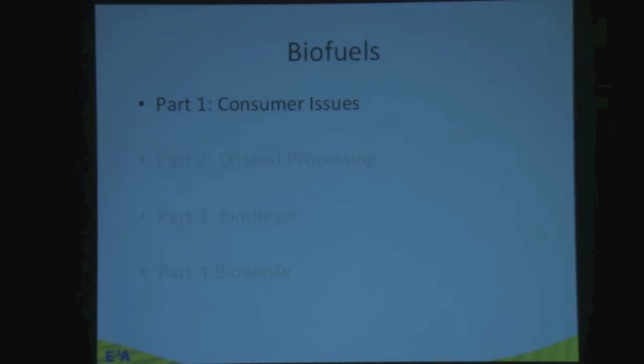So, in general, biofuel is simply just a liquid that you can make that either will come from a plant, algae, or animal parts, animal fats. So the crop plant may be oil seeds, such as we'll discuss at first, or it may be vegetable oil.

Algae, I just came back from the International Biomass Conference in Minneapolis, and it probably isn't real feasible up in our area, though we have a lot of coastline and such, as much as it is in the warmer parts. They're doing a lot of work with it off the warmer coasts down south. And there are places even in the Midwest that are using algae, growing them in large ponds. But there's a different type of processing. They tend to throw it in with anaerobic digesters, which we'll talk about a little bit later.

So animal waste, not just fish, as I mentioned, but even turkey poop's being used to drag the BTUs out of it for gasification of fuels, mostly for space heating. So some of your bio products can be pressed and immediately used in a traditional diesel combustion engine. Some are going to supply heat just in the form of burning the straight BTUs and pumping heat in for like space heating and such as that.

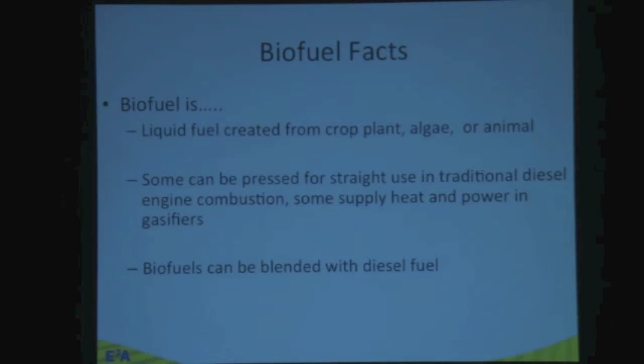So in Alaska, there are 2 main types of biofuels that are obtained from ag products. Obviously because of the short growing season and the incredible height that we have of sunlight, especially in the interior and Palmer, it's not real conducive to corn for ethanol, for instance. Now there is corn being grown as feed corn down on the Kenai, but you could never really make it profitable enough to try to raise corn. Your inputs and your energy would be too much on the Kenai to try to get the kind of scale that you would need to go with some type of ethanol production.

But especially up in the Delta Junction area east of Fairbanks, they tend to grow a lot of barley, which isn't an oil seed, okay? But they can go ahead and also grow canola. And canola comes off, you'll see that's the canola flower up in the left-hand corner. And you can get rapeseed, which can be crushed, and then that seed secretes an oil.

Another type of plant, and by the way, some of the farmers up in Delta just this year, for the first time, are making a real concerted effort towards securing land so that this planting season they're going to actually put some canola in the ground and see how it presses out in the end.

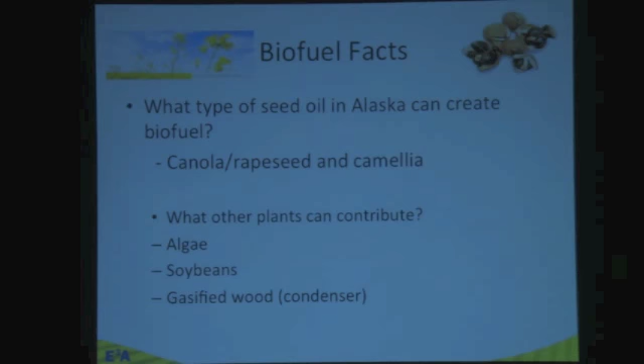You can gasify them, and you can then take the vapor from the gases of the burning wood, and you can condense it by cooling off some of that vapor and having it more or less poured off to the side and put it back into a liquid form.

So one of the things that I want to emphasize that you might not normally think of is when we think of trees, we think of forestry. But the U.S. Department of Agriculture, well, it worked obviously with corn, all right, and the Department of Energy on solutions of making ethanol. USDA is also very involved with wood, because in the industry codes that are used in North America, wood and trees are seen as a crop. They're actually seen and classified as an ag product.

This is somewhat important when you're looking for grants and you're trying to find sources to try to figure out exactly how things are categorized, because you might be able to cross over if you had an experiment project that you wanted to do with even a couple of different agencies. You know, Department of Energy may be interested in it. And as far as wood gasification, you know, it might be also that USDA is interested.

And even in some cases where they're starting to make biofuels for fighter jet fuel, the Department of Defense will sometimes do investigative RFPs to try to get production, because they have certain quotas they're trying to meet as far as turning all of their fuels for their ships and aircraft into biofuels.

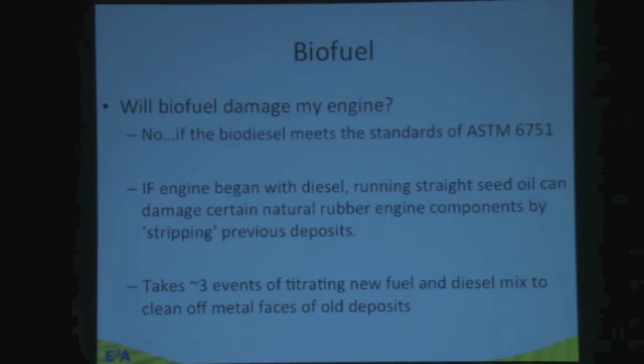Now, vegetable oil is something that is used in engines that might even be a dual source. The director of the Alaska Center for Energy and Power out of Fairbanks, which is kind of the research arm for the whole state, looks at different power sources—where they work, how they work, what's the best type of efficiencies out of them.

On the back of her car, she has a little sticker that says powered by vegetable oil. And believe it or not, she has 2 tanks in the car—one that runs on vegetable oil and one that has traditional diesel fuel. I believe it's a switch within the car; she can switch tanks and still run it off the same engine. I believe she gets most of hers as WVO, waste vegetable oil, out of fryers in different restaurants.

There have been experiments, though, with just using straight vegetable oil also. You can modify an engine, or have a car that uses the same engine for both. In some states there's quite a bit of experimentation with the 2 oils. In Alaska, there probably just isn't enough critical mass of fast food restaurants to really do experimentation and spend the time, money, and effort to see how those fluids operate in really cold conditions, or on the coast in really wet conditions, just because there won't be that much demand due to the lack of supply.

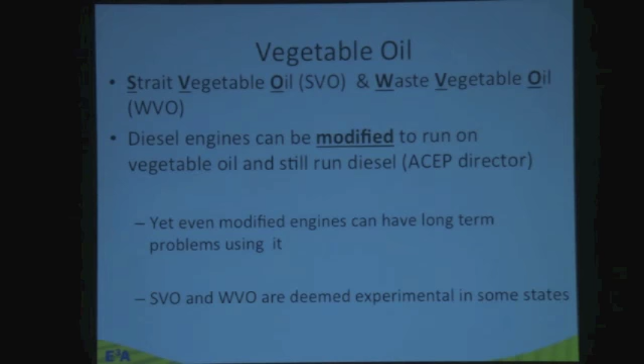So in looking at this, you need to look not just in the energy vein, but at what that product can be as a substitute good in a totally different market. That will indicate whether that industry is going to grow or not.

Let's take a little deeper look at oilseed production. You basically have machinery, and it might be sunflower seeds, could be peanuts, as well as soybeans, as I mentioned. You bring the product in as raw crop, and it's been separated from the leaves, or in the case of corn, you've stripped it from the cob—though that's not an oilseed. But we're just talking about the kernel of the seed.

So you have a process that must take care of not only making sure you have the seed separated from the leaves and twigs, but you also want to get any foreign matter out that may have been collected in harvest. Then your second stage is this crushing activity.

There may be other ways of dealing with other types of seeds, but in general, canola being one of the more popular ones, all you're doing is extruding the material out. Then you take the meal, and the meal may still have oil in it. So you've got the separating, then the crushing. You separate the meal, and you may even use solvents to eke out more oil from the meal that didn't come out during the crushing process.

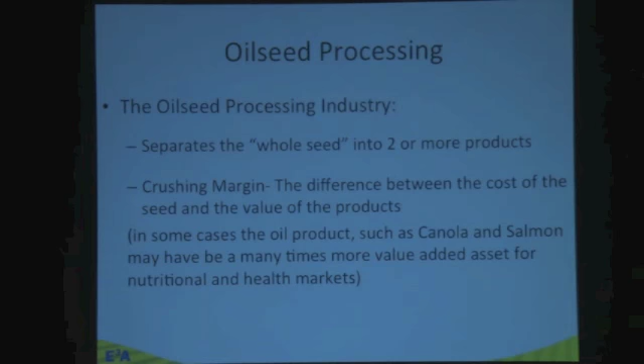In fiscal terms, they talk about the crushing margin, which simply is the difference between the cost of the actual seed and what you're getting out as the end product. As I mentioned, you need to be aware of other markets besides energy.

What percent recovery are you talking about, as far as on your first crush, getting the oil out of the meal?

The figures I'm shooting off the top of my head, and I can reference them pretty quickly, but the figures I've seen are that you can get at least two-thirds of the oil on a single crush—two-thirds of the oil out of the seed.

So what's the percent by weight? And with the feed, what do you end up with? I'll show you in a moment—I've got some of those figures here.

As I mentioned, you can enter a solvent, and the solvent not only helps in the process after you do the crushing and separation, but it can also change the qualities of the oil, such as what temperature it takes until it starts to gel.

As I mentioned, it's kind of the step you'd use to get that extra margin bang for your buck. You'd asked here about typically used facilities with capacities of less—so it also comes down sometimes to the scale of the material you're working with as to whether you're going to invest in solvents.

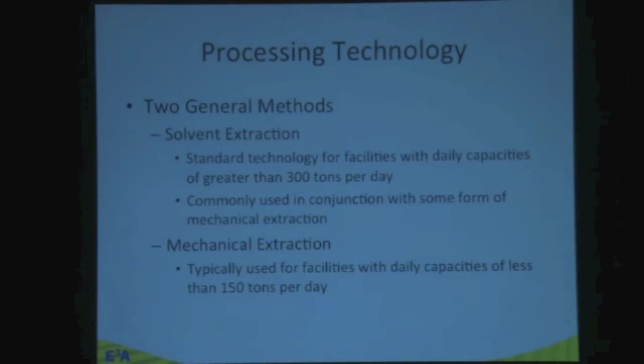As I mentioned, the different scale will also dictate whether it's worth your time to go through the processing. With solvents, you can get about 99% of the oil. It's not an evaporation process - it was explained to me once that there's a way you enter the solvent, get everything you can out of it, and then exit the solvent as thoroughly as possible out of the oil, for the sake of the rubber seals in engines if you're using it for combustion. They drive it off, not through evaporation, but through another process - I can't honestly remember what it was, but that's something I can find out for you. So that's a benefit, eking out the last that you can.

One of the drawbacks is anytime you're using a chemical process, you're also going to have a larger investment, not only in the product, but you might also come under other regulations and need other separators. You might be talking machinery, or you might be talking product. As was mentioned before, if you're doing small scale production, it's not really cost feasible.

I had worked at a small ag university in the Midwest, and they were pressing - they had tanks that were probably like 200-gallon tanks, just doing the raw pressing. It was right above my office. In the summer, we were in an area that had sometimes 98% humidity at 90, 95 degrees. And boy, you'll never forget the smell of canola when you have to sit all summer having it waft up through your door and windows. And that was just the raw stuff itself - it wasn't caustic, but it certainly wasn't pretty.

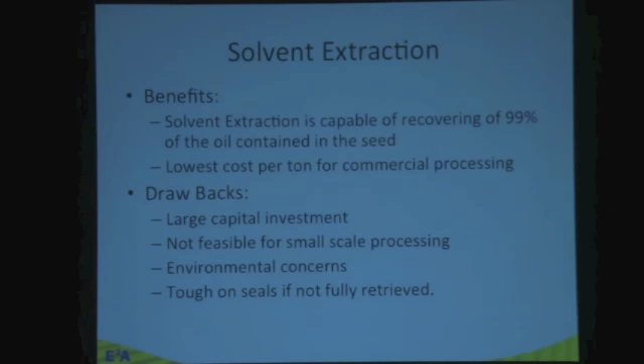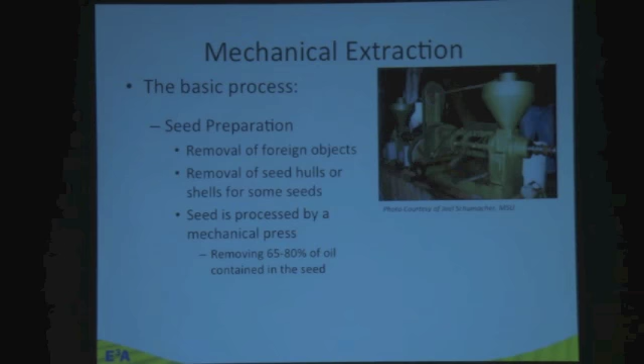So canola oil - you'd asked about not the recovery, but what the output was, I guess. It's been estimated, again from Montana State University, a state where they have quite a bit of experience, that if you had 100 acres of canola, you can end up with basically about 55 tons of material. By weight, excepting the gallons - and I'm not sure how many pounds to a gallon of oil - you'll get about 4,200 gallons of oil, and then you'll get 36 tons of meal. That's assuming you've gotten 75% out of it. So this is a situation where you've got a really good press, but you're probably not using solvents, so you're certainly not using them thoroughly.

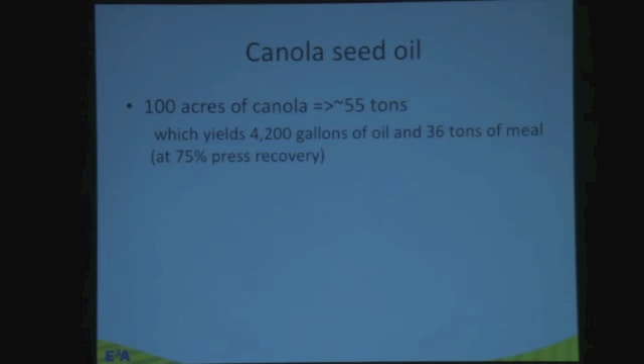The benefit sometimes of having a small scale, though, is if you have a cattle or hog operation, you can figure out that even if you won't be able to use as much in the tractor, the oil helps to put weight on the animals. You have a much more supple meal that you're giving them, not as dry. And oil, of course, has calories also besides BTUs.

So I mentioned that there's a whole industry that takes separate types of biofuels and mixes them to make a product you can run your vehicle engines off of, your diesel engines and such. And the advantage of diesel, so with ethanol, which was not oil based but more of a sugar alcohol based system, a lot of that was mixed in with gasoline. You'd see E85, some of these standards that let you know to what degree there had been ethanol as an additive.

And the advantage of mixing some of these oils with diesel is that besides transportation, you can use these, especially in Alaska where we have a lot of remote communities. If there can be some growth of these materials, you can use them on the gen sets that produce electricity. Diesel is kind of the currency fuel throughout, especially rural Alaska.

So when biodiesels are made, it's going to depend to some extent on your mixture. This is to give you an idea, I think it comes out roughly a little less than, let's see, maybe 8%. When you do your mixture, it's not going to be the same as what you normally get of pure petrol. Not that there's a degradation of the petrol itself with the mixture, but you're just not getting as much from the actual biofuels.

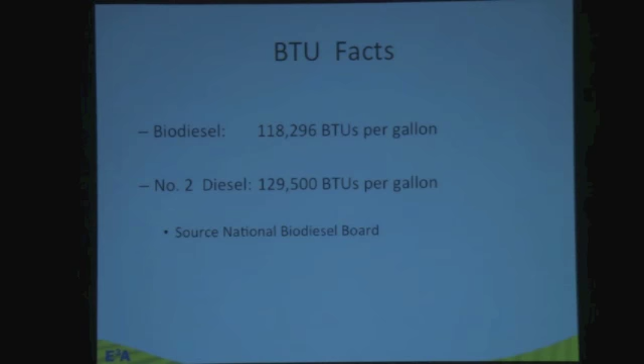So you've got a little bit of additive, and for a place like Delta Junction, if they're growing seeds, which they don't tend to do in Palmer - Palmer tends to be more vegetables and other produce for consumption, not so much grains. But if anyone was serious about getting into the industry, they would obviously need chemists on hand, and machinery that measures and calibrates very carefully what your mixtures are.

Now, one thing I'll mention at this point, only because we're going to talk a little about gasification later, is that an interesting development in Delta Junction is that they are growing crops for BTUs to burn for fuel. But it's not necessarily to make biofuels or bioliquids, let's put it that way.

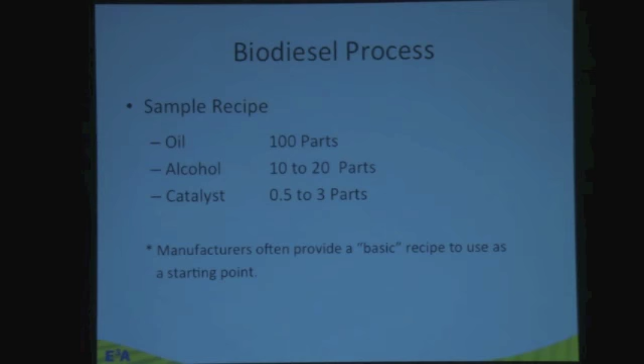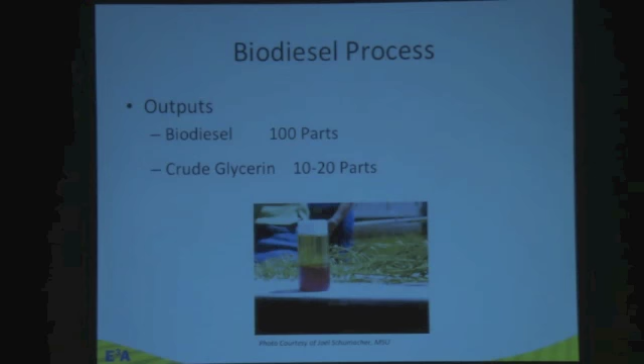So when you make these mixtures, you're getting 10 or 20% as glycerin. Here, in a micro scale production, you're talking about making maybe 300 gallons or less. So this would be something possible if farmers wanted to make biodiesels for other applications, maybe generator sets and stuff that may not be as conducive to using raw canola, like a regular tractor engine.

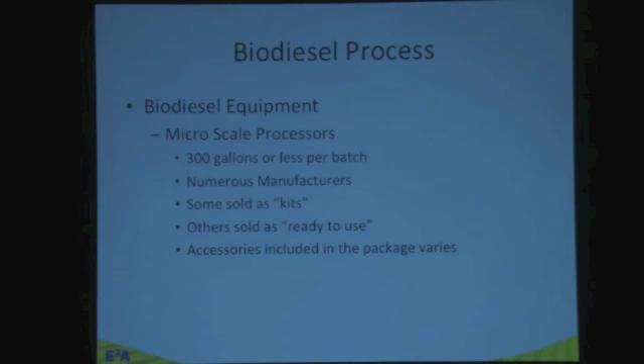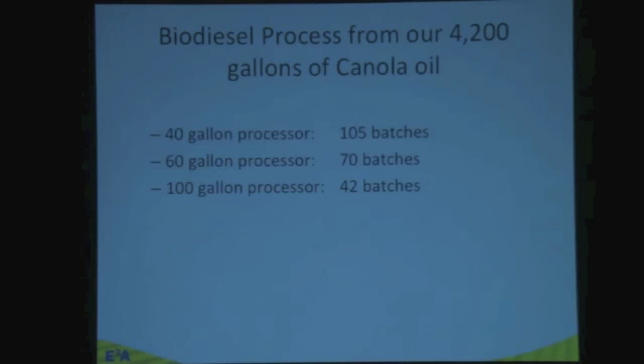There is the ability for individual farmers to actually produce biodiesel. We figured earlier the amount of canola that would come off the acreage. Here they just show you the difference in scale - you could get really small producers and come out, but you have to do a whole lot of batches, or go larger depending on what you think your usage is going to be.

The main thing to take away from this is that I don't think biodiesel in general is a very stable way of investing time, effort, and new machinery to use your oil seed, and here's why. According to this, if your seed costs change just 1 cent a pound, because of the process, it can make the difference of 27 cents a gallon - a quarter a gallon - of your output.

If your meal revenue changes, it really isn't all that volatile, nor your crushing. But again, the point is not to equate all these numbers to different parts of the process, just that from year to year seed prices can vary. Corn started out last summer, I believe, around $2-3 a bushel, and at some points in the season it was bouncing up towards $7-8 a bushel. That's a huge variation for the seed product, whether you're using it for planting seed next year or as your end product.

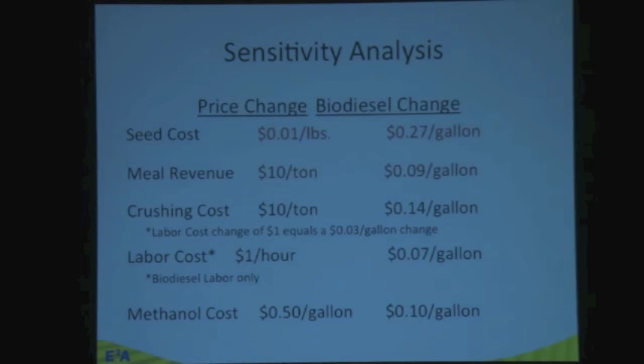Here, it just seems to be fairly volatile - well, maybe that's not the right word to use in a chemistry process, but it seems not so stable, let's put it that way. So this illustrates that over the last half decade we've gotten quite an export market going, and this again is U.S.

Production, mostly peaking out in 2008. 2008, as I recall, that's when we had our financial crisis on Wall Street, but also the markets were going bonkers as far as ag product. And so obviously, along with more exports, you had more production.

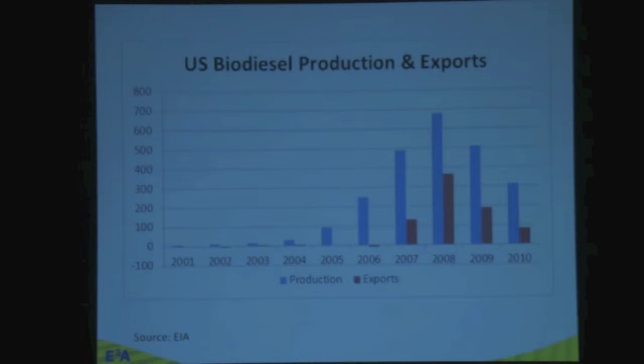Now, I think the interesting thing here is just to see that you have fuels that over the course of almost a decade, 9 years, you have biodiesel prices that are intermingling with diesel prices, but especially with this B100, and you're talking again at an aggregate level for the whole United States, they tend to be keeping pretty close together and in step.

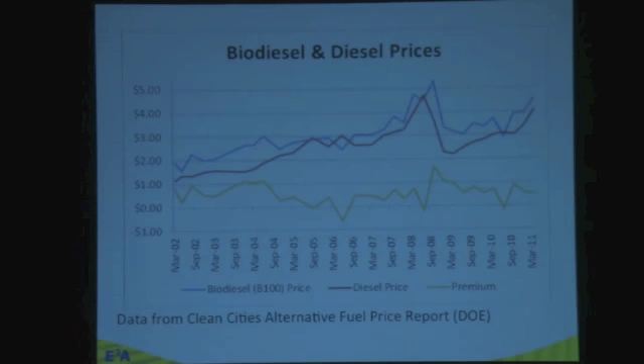And remember that probably isn't unusual, because your costs in producing seed or ag product is highly dependent upon the cost of petrol because most of your machinery relies on it. So this isn't unusual to see this.

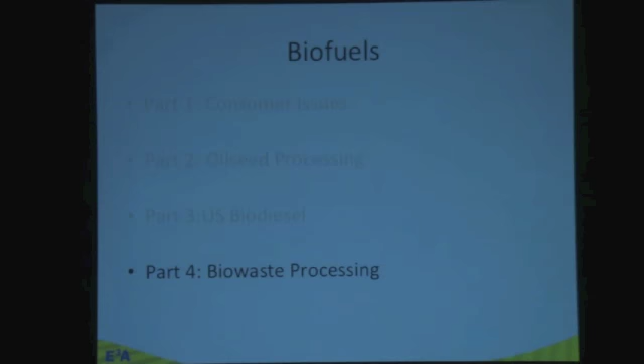Now I'm going to talk about a couple different processes here when talking about fish wastes and what they can be used for. But probably one of the ones that we have the most data on that's been experimented out of Palmer is gasification. And that simply means that you're taking any type of organic matter.

It can be corn cobs that the corn has been stripped off. It can be grasses like switchgrass or willow brush. It can be turkey poop, such as they do in the Midwest on big turkey farms. It can just be regular old hog fuel that's been chipped up from running any type of tree through it, or it may even be sawdust. But anything that's got BTU value, you can run into a drum or a hopper. That's just a 55-gallon drum, okay?

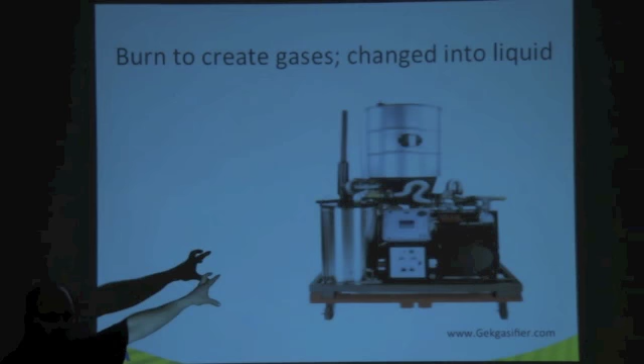Or another option is you could take those gases that have totally vaporized all the product in there, and I'm being very, very simplistic, okay? So if anyone's a mechanic here, they'll probably skewer me before I get out of the door. But you can port those gases off into another chamber, and you can cool the chamber down, and it will condense into fluid, all right?

Now, I don't know to what degree, if you run just wood chips in there and you decide to do that, that you'd end up with necessarily grain alcohol. But I've had somebody tell me before, oh yeah, my uncle used to do that all the time when he was bootlegging right out in the village. I mean, it's a similar process that his uncle used.

So this is a unit that these guys from Berkeley sell. It's on wheels. You can get the 10K to take care of your house for like 18 grand. You can get the 20K, which is twice as big, for about 25 grand. And you can even get a connex that they stick it into. So think about this for bush application, for a tribal hall, or a small processing facility, or a school that's maybe 60,000 square foot, or a factory.

You can take a 100 kW one and they put them in connexes. And you have to have a good feeding system, but you can adapt it for heat if you want. Although this one, because of the way it's built so compactly, you just want to use it for electricity. So this gasification method has a lot of different outputs that you can run off it.

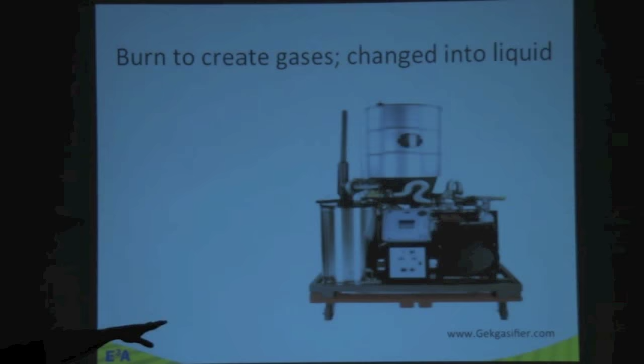So Andrew Soria out of Palmer worked with a couple of other researchers, and by the way, just the generic name of this is GEK, Gasification Experimental Kit. That's like saying radio control helicopter, okay? And these guys have taken that description of what kind of machinery it is into their name, and you can go on their website and see what they've got going.

Well, Andrew Soria had gotten a hold of one of the first GEKs that this company had ever put out, all right? And he decided to take fish guts, throw them into a blender and mix them with chipped alder sawdust. And then he was going to pour the blender into forms of pucks about this big, and then dry them out. And once they were dry, they were basically fuel pellets that he was going to experiment with to see what is the optimum burn.

In alder and other wood, you have lignins in there. Okay, you have pieces of fiber, right? And it's not just about the BTU value, but there are other mechanics, the form and the shape of the material and such, that can dictate the release of energy, more or less. And I'm being very vague about that. But what they decided to do was pour these little cakes by mixing in different amounts of salmon. You got 100% of product.

And what they found is when they burned different amounts, they first of all wanted to control and drive out all the moisture ahead of time, no matter what percentage of alder, what percentage of salmon. And they were using salmon heads, okay? And they wanted to drive off the moisture. Any idea why? I mean, have you ever burned green wood compared to dry wood?

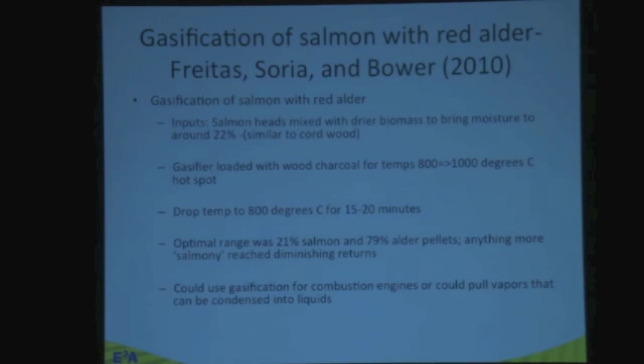So anyway, again, you have engineers who are really controlling these processes because they know if it's just a couple more minutes, you're going to lose everything. So anyway, one of the things that came out of this is that you could obviously gasify a combination of alder and fish at that particular level, and you could run one of these engines and you could get electricity off of it, heat or some type of other oil.

It's a pretty unique study that he did, and Andrew doesn't publish something until he knows that it's been tried and tried and tried. Now, the last thing that I'd like to speak about is using biological waste for combined heat and power.

But when you're talking about a whole community, often what you want to figure out is how can we use organic matter and basically get both heat and electricity. And so you have powerhouses that try to find an optimum point in which the machinery will take care of electrical needs and take care of the heating needs.

And so CHP, the common term, in general, when you're talking very large scale and you're talking large gen sets, large powerhouses, it seems as though if you can balance out your production system so that you can get 40% electricity and 60% heat, that tends to be a good goal, a good rate.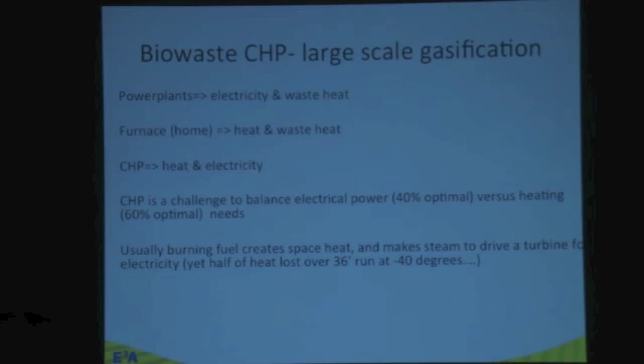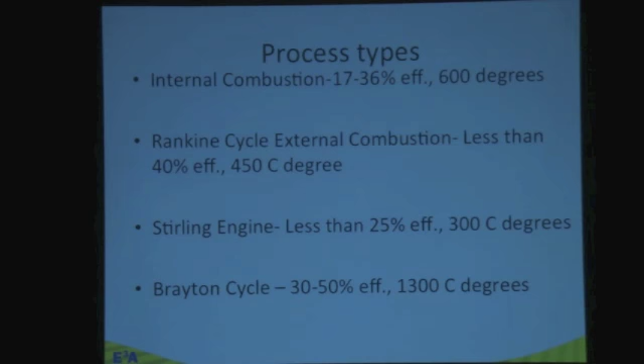I just want to point out that an internal combustion engine is what that one gasifier uses—common, like in your cars. Bernie Carl at Chena Hot Springs is using water out of the ground at 140 degrees with a Rankine cycle, good for what we call low temperature heat, low production. And Stirling engines have been used in a Brayton cycle.

The other thing I want to talk about, and I'll end on this, is that if you have waste like fish waste on a large scale, and you don't want to go through the trouble of setting up a large process to mix it with alder and use it in gasification, there's another process that farmers use with cow dung that can be used by large processors with fish waste—anaerobic digesters. Basically, they're making a sewage treatment plant.

They're setting up a system—some are fairly small—where you take all your waste, your fish waste, and let it rot without oxygen. It gives off methane gas, which in vapor form drives a turbine by firing off, much like that gasifier. You just leach it off the huge tank where you have your slurry of waste.

This is also somewhat similar to the process they use in landfills. In landfills you have organic waste—you don't know exactly what's in there—but also stuff like cardboard, paper, rotten banana peels. So now they're drilling wells down into landfills to capture methane that's naturally created as the landfill is covered and there's no oxygen underneath. You've got this process going on.

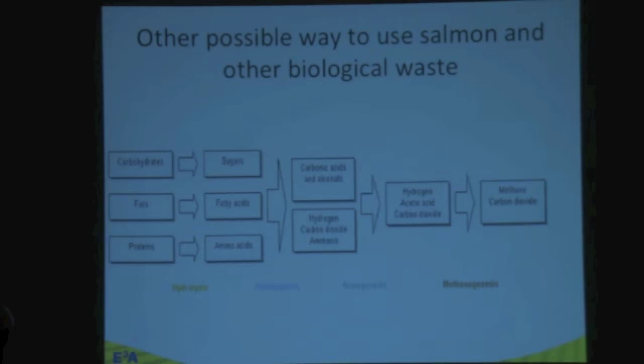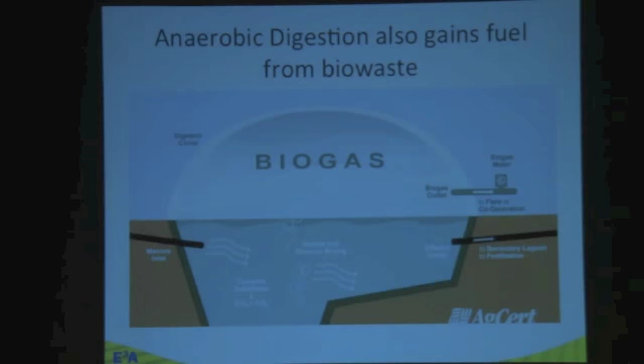So let me ask you—we've gone about an hour, an hour and five minutes. Are there any methods you're familiar with, from here or other communities you've lived in, where people are innovatively taking either grown plant product, whether intentional like farm product or algae, or taking waste from animals, whether dung or animal parts, and getting energy out of it? Has anyone had a creative uncle or been part of an industry like that?